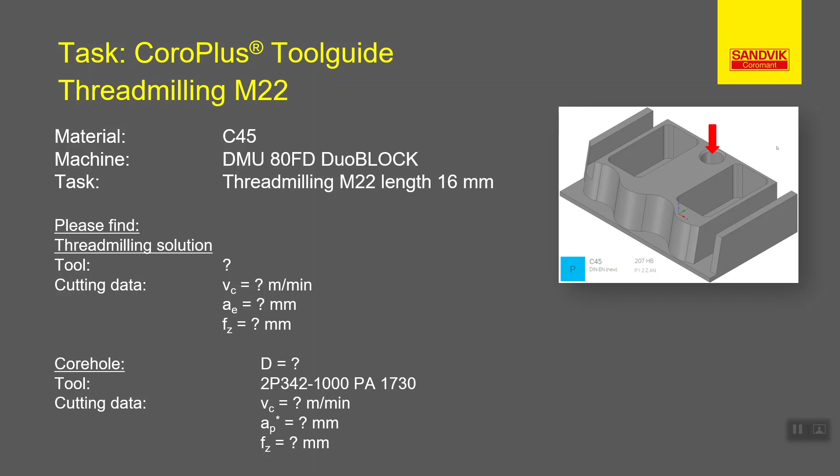Directly from our website, we will access CoroPlus Toolguide, and on the right side we have the function, what would you like to do today? We would like to find cutting data, find optimized cutting data. This will take us directly to Toolguide, and here we start by selecting our material. We have C45, new.

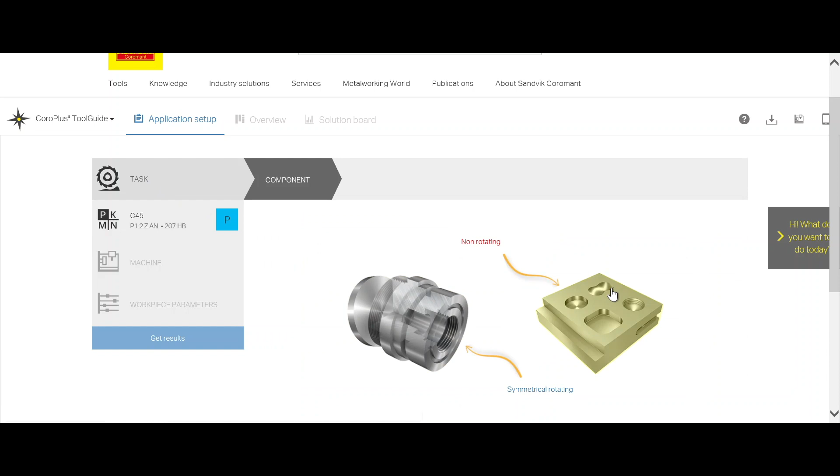Next is task: non-rotating, thread, and a blind hole. Here we select the thread form, where we see all the different thread forms that we can produce. We have a metric size 22. Thread length, we have 16 millimeters.

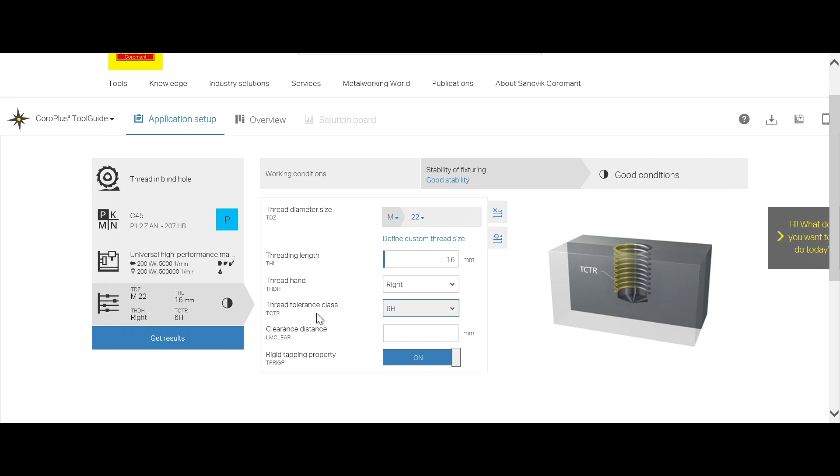It's a right hand thread and a class tolerance of 6H, which can change if a different tolerance is requested. But for our example, this is good, and we continue to get results. The first recommendation is a cut tap, which is the fastest solution to produce the thread. But for our task, we have to produce the thread with a thread mill.

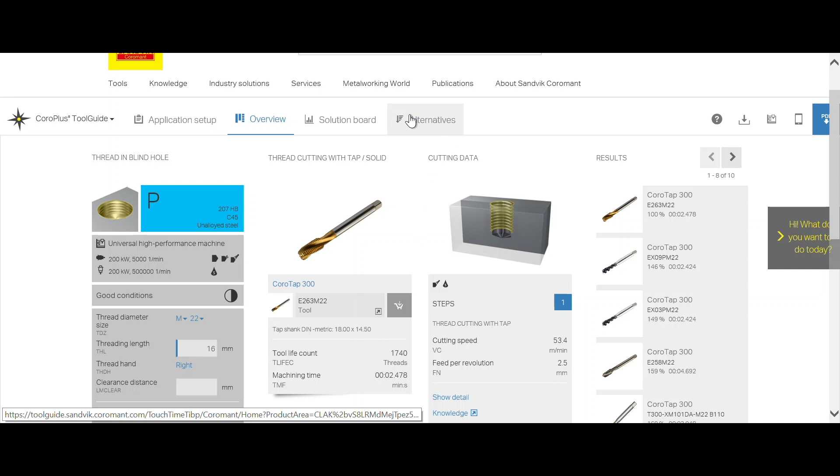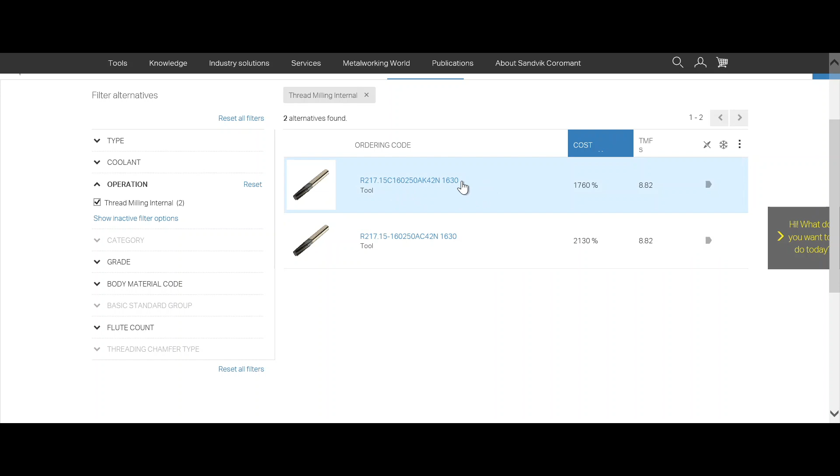So we have here above a function called alternatives. We click on alternatives, and now we can filter to our operations and request a recommendation with a thread mill. We say apply, and we get two recommendations, two thread mills. So we select the first one, which is the most cost efficient, and we go to details.

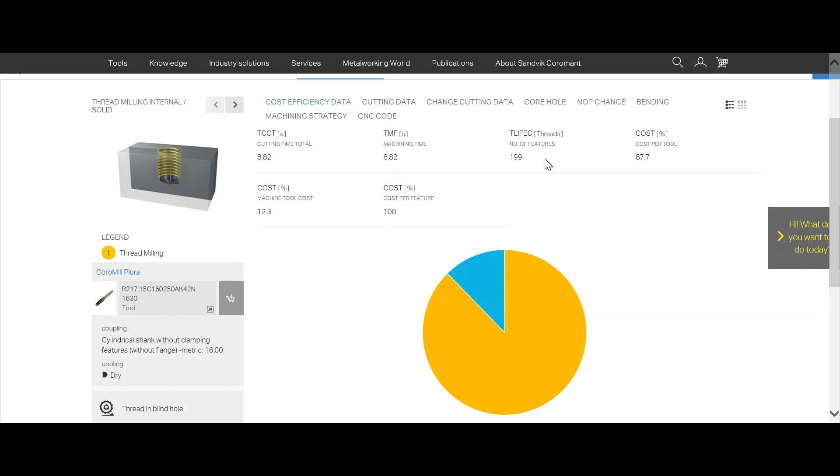We can take a look at the cost efficiency data. We see cutting time in seconds: we have 8.82 seconds. Estimated tool life 199, almost 200 number of holes. Cutting data, we have the speed, the feed, the tool center point feed, and also the feed speed at the machined diameter. Since we are going into a circular motion, we have the two different feeds, which is important to take notice of, as one is much bigger than the other.

We have the radial engagement of 1.25 millimeters, full depth of cut of 16 millimeters, and number of passes in AE direction 1, so we're taking only one pass radially, and AP also one pass. We have here the cutting power, a low cutting power.

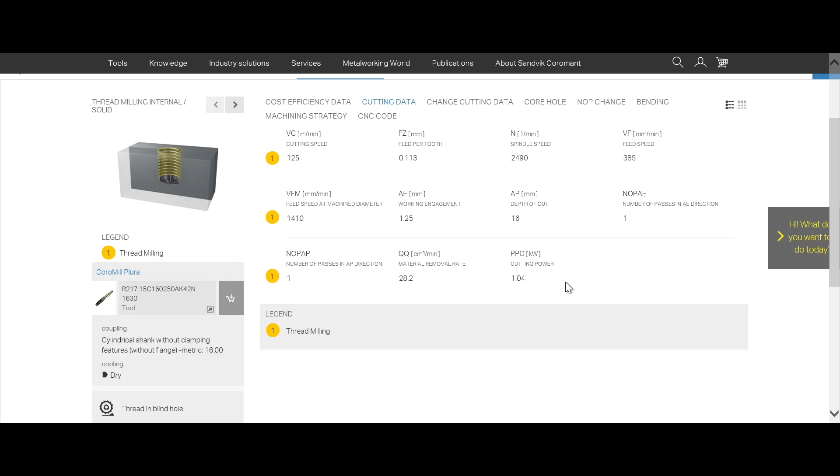And now also very convenient when we are programming a thread is to get the CNC code. So we can go to the CNC code, and based on the numerical control that we use, we can select it and request a CNC code or a CNC report.

The CNC code is just the text that you can directly import into the software or your machine, and the CNC report is a little bit more detailed, and it will give you a description line by line with what the tool is doing per each line. And we can see here

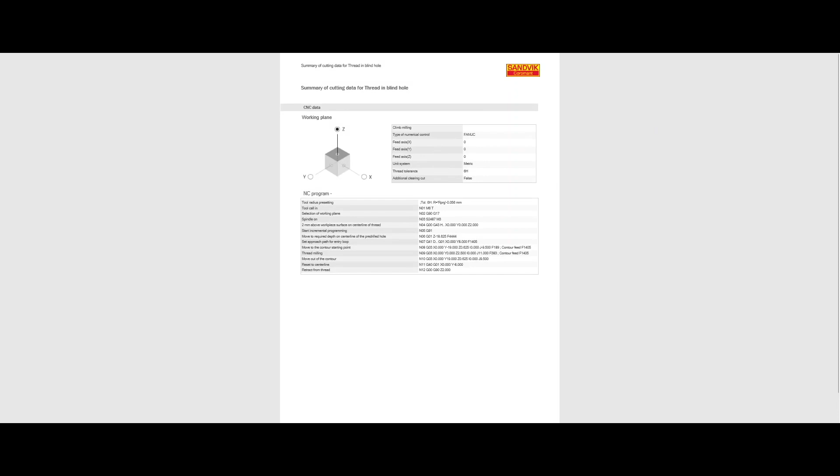the code and the description of each line, and we can see the first line gives us an RPRG correction that we need to enter in the machine, a radius compensation of our tool in order to produce the desired thread tolerance from the beginning, from the first hole. This also is laser engraved on the tool, on the shank, and it's important to have this entered on the machine from the beginning, like I said, to get the right thread tolerance from the beginning. So you don't have to make smaller adjustments after the first hole.

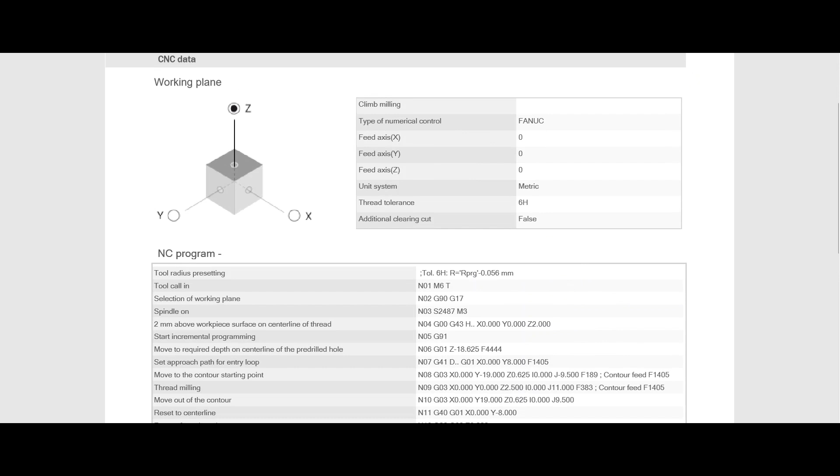Now we'll go back to the tool guide, and here we have next to produce the core hole. And based on our tolerance, we have a recommended core hole. In green, we can see we have between 19.29 millimeters up to 19.73 millimeters. And here, if we go in the middle, we have 19.5 millimeters, and we can search for a core hole.

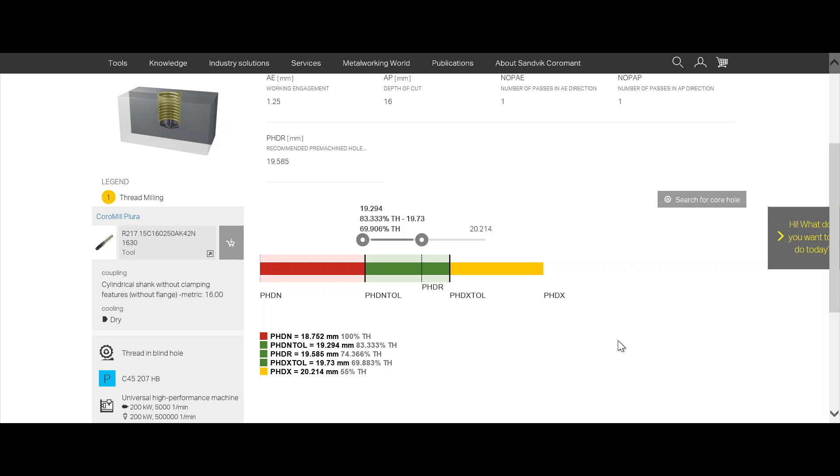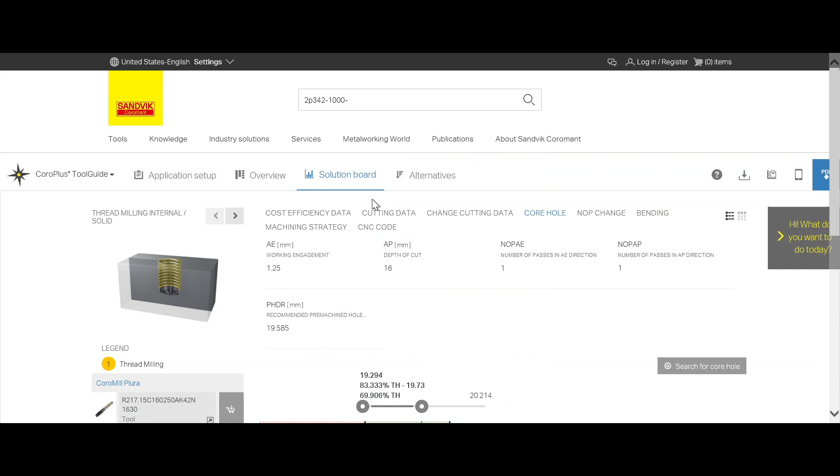But we already have a selected tool that we would like to use to produce the core hole, and now we will enter that in the search function and we will use Tool Guide to give us recommended processing values for the core hole with our pre-selected tool. And here we have our tool with the description and all the relevant information about our tool. Also 2D, 3D models, and we move to calculate cutting data.

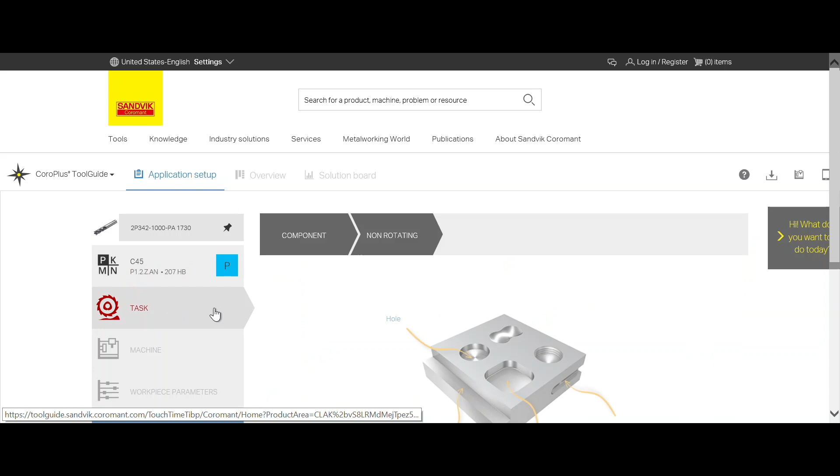Here we see our tool is already pre-selected, it's pinned to the application. So now we have to select our material, C45, new. We move to task, and here a little trick we have to use. Since we are not using a drill, we are using an end mill, we're saying we are producing a pocket, not a hole. So we say a pocket, and we are producing a round pocket in solid material.

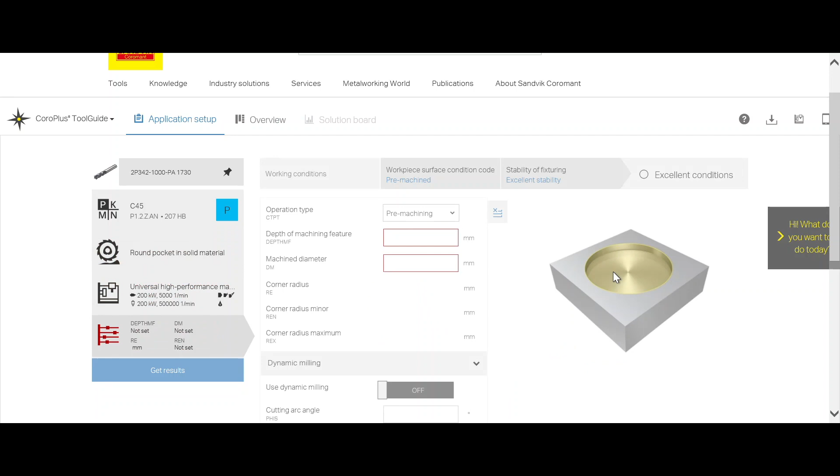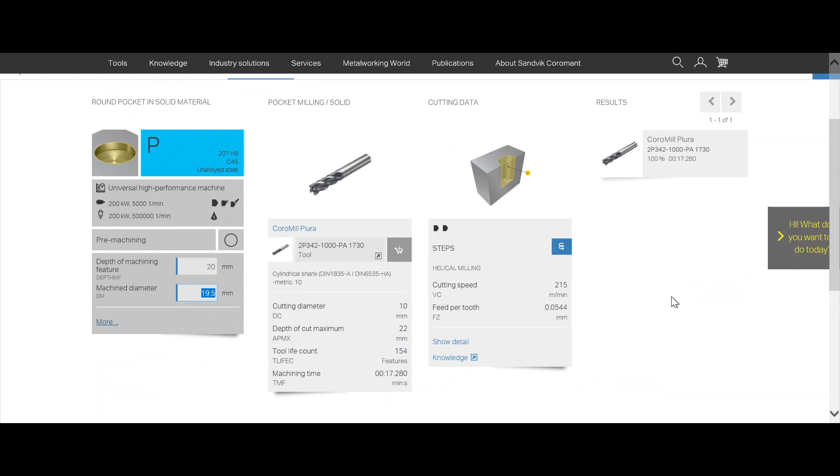Our depth is 20 millimeters, and the diameter is 19.5. And we say get results. And we go to show details. And we have here the cutting speed 215, feed per tooth 0.054. Again, we have the tool center point feed and also the feed at the machined diameter, which is much larger than the center point feed.

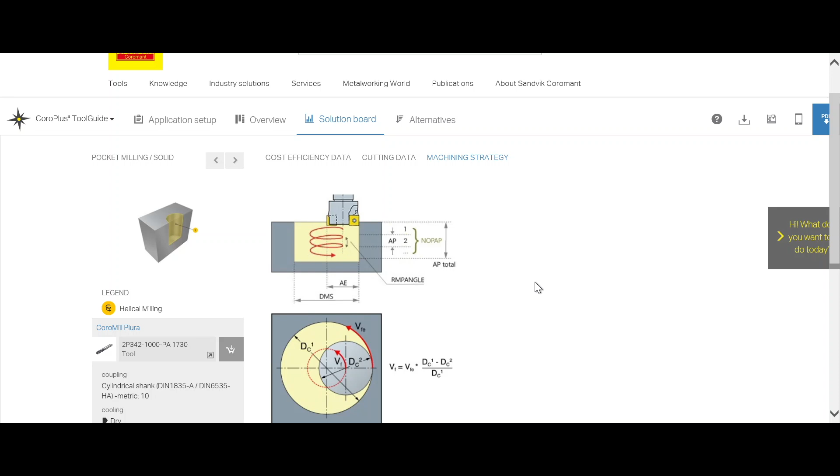Radial engagement, depth of cut, so we have a 2.86 depth of cut per pass, so per each circular ramping we have an advancement of 2.86 millimeters in depth of cut. So that is a ramping angle of 5.47 degrees. Also we see the cutting power very low, and the machining strategy of the helical milling motion, ramping.

Good, so we have the cutting data for both tools, for the thread mill and for the end mill to produce the core hole, and now we can take these values and see them run on the machine. So let's take a look.

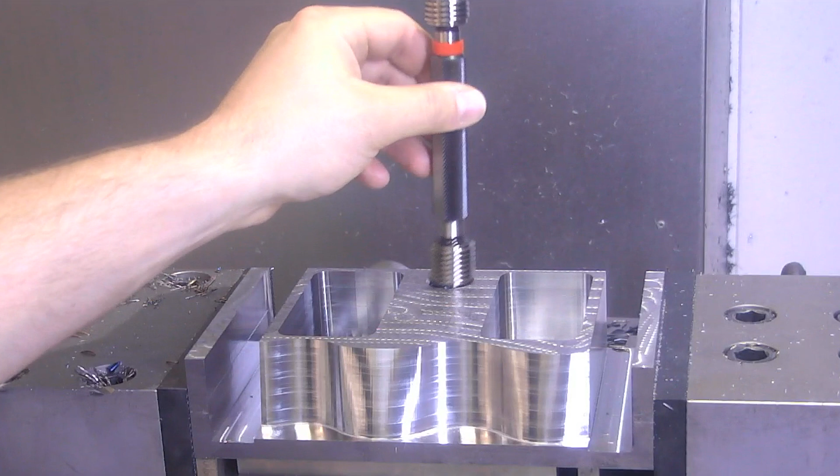What do you say? Did you find it easy enough? With the help of the CoroPlus Tool Guide, we can quickly and safely find the solution for this complex threading process.